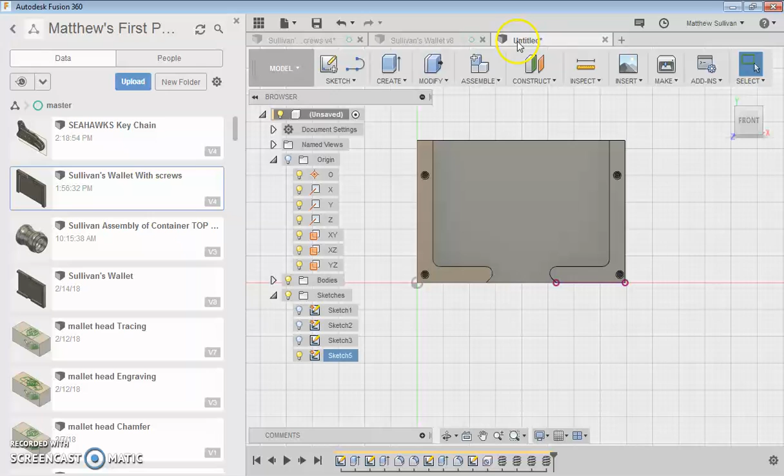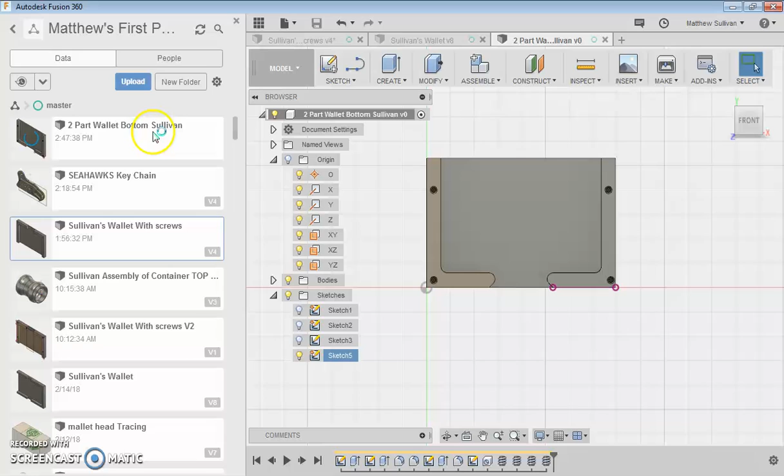All right, welcome back. First thing we never did is we never saved our project. Our project is still untitled. I'm going to go ahead and hit Control S. I want to call it two part wallet, bottom, and I'll put my name. Go ahead and save. Don't put my name on your part, but do put your name on your part.

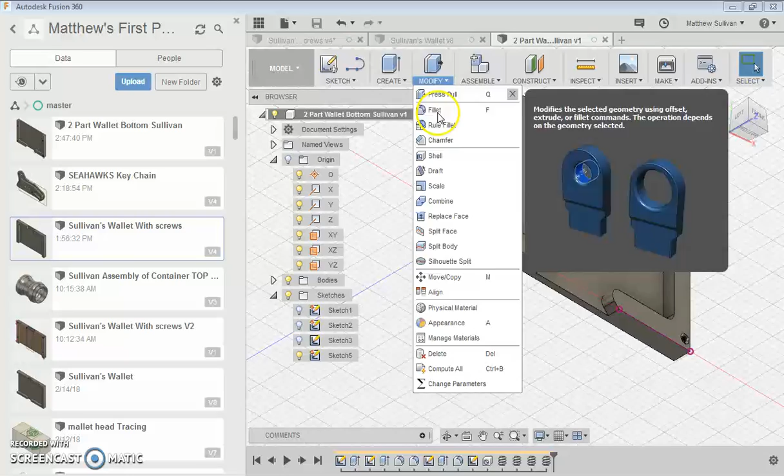The next thing you're ready to do is start modeling the top piece. In order to model the top piece, I think the most important thing to do here is go over to modify, even before you begin. I kind of think these corners are pretty sharp - you might rip a hole in your pocket. So put a fillet, some sort of fillet or radius, on these edges.

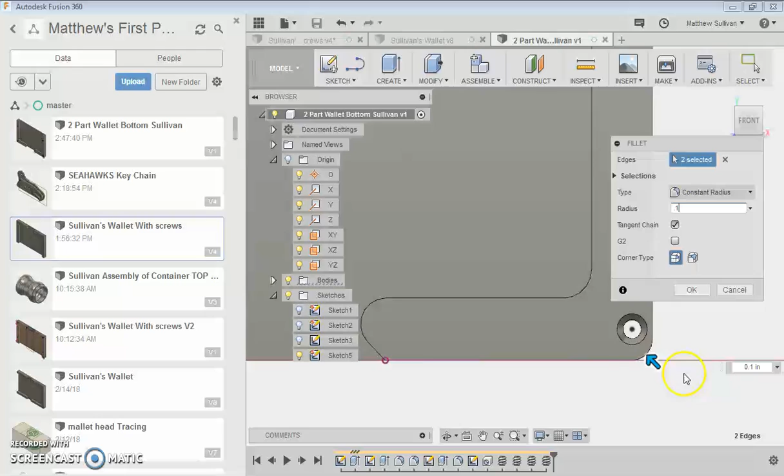It doesn't need to be crazy, doesn't need to be too big, but try 0.05. Maybe play around with the radius, or maybe go a little bit more, like 0.1. It appears you should have enough room here all the way around your holes. It looks like I have a dimensioning issue right there - this side looks great at 0.1, but this side looks like I'm too close and not lined up with this feature over here. So I'm going to select OK.

I'm going to come back over here under my sketch, edit sketch, and I obviously have a typo. 3.825 should be 3.825, not 3.875. So if you think something is goofy or wrong, go ahead and adjust that.

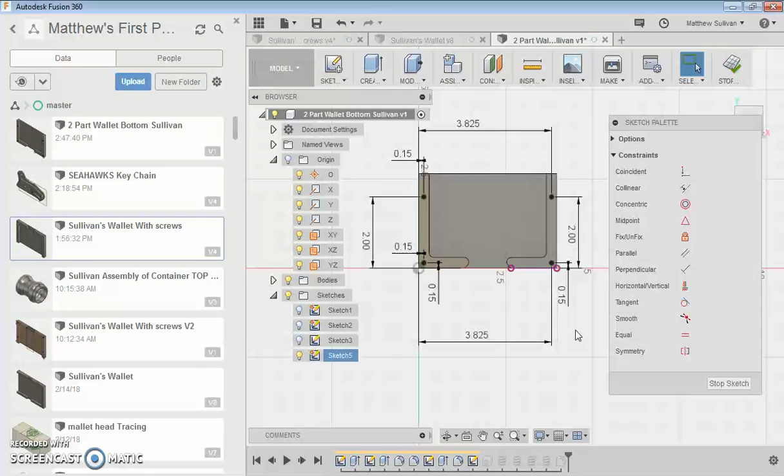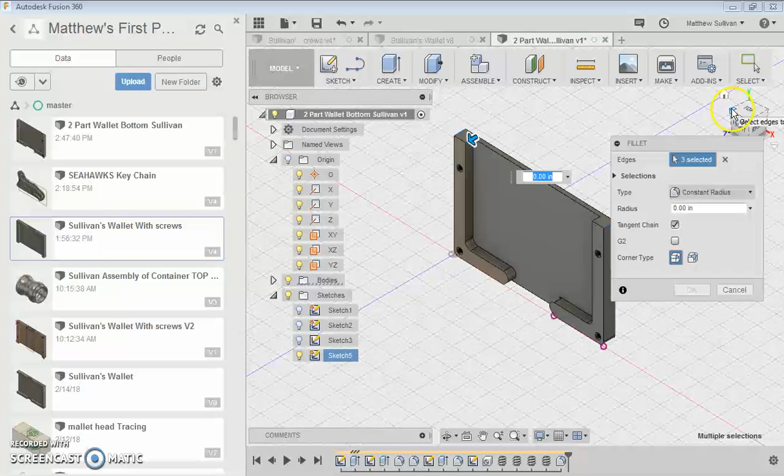Now things look a lot more uniform. I'm also going to do a radius so I don't rip a hole in my pant pocket. I'm going to do a little radius here - a fillet. Actually it isn't a fillet, it's actually a radius on these features. So a fillet is on the inside, a radius is on the outside.

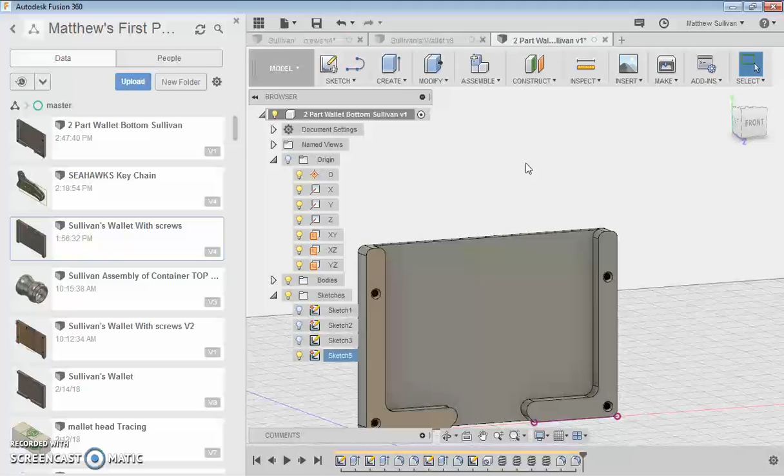0.05, I believe, is the size of the radius I did on the other one. Maybe I did 0.1 - if you did do 0.1, you could always double check. I did do 0.1. You just click down here, change it to 0.05, or 0.1, select OK, and now you have fillets that are 0.1 all the way around the external or outside of your part. It's kind of up to you if you want an inside radius.

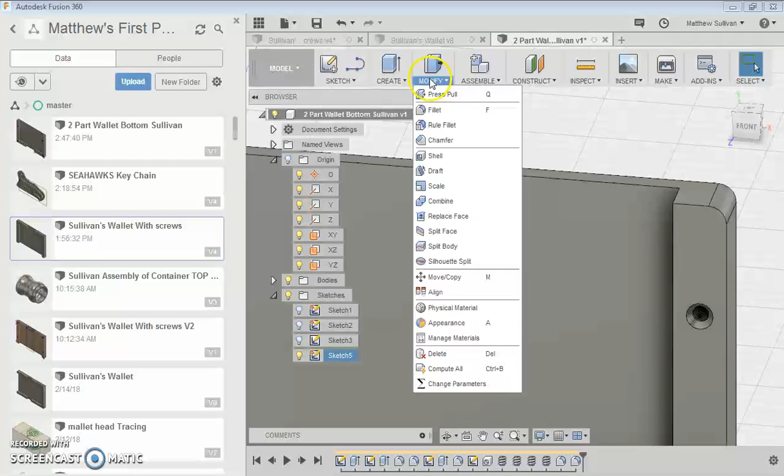Maybe you only want to do these edges here, this one and this one, at 0.1, and not do the inside radius, or maybe you want it even a little bit smaller. But you can still do it - radius tool, modify, fillet. You could do something like 0.025, 25 thousandths radius, just something really shallow to round it out so you don't have a sharp edge, or break a credit card, debit card, or ID.

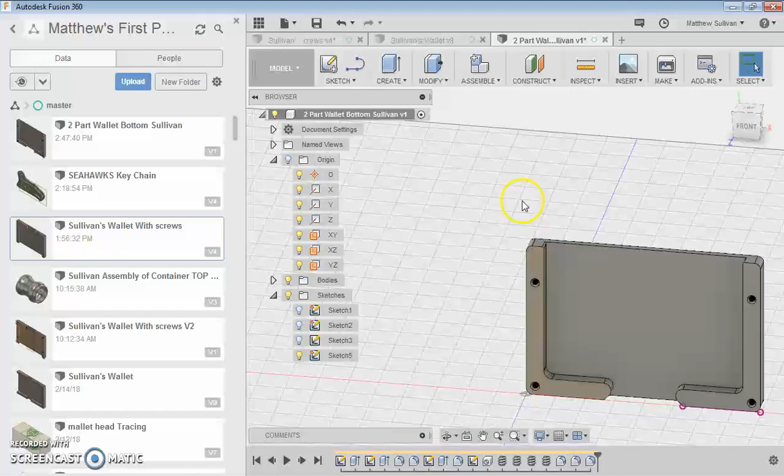Now you're ready to begin modeling. So save your part one more time. Now you're ready to begin modeling the top. Modeling the top is not too difficult - there's a couple different ways you can go about it.

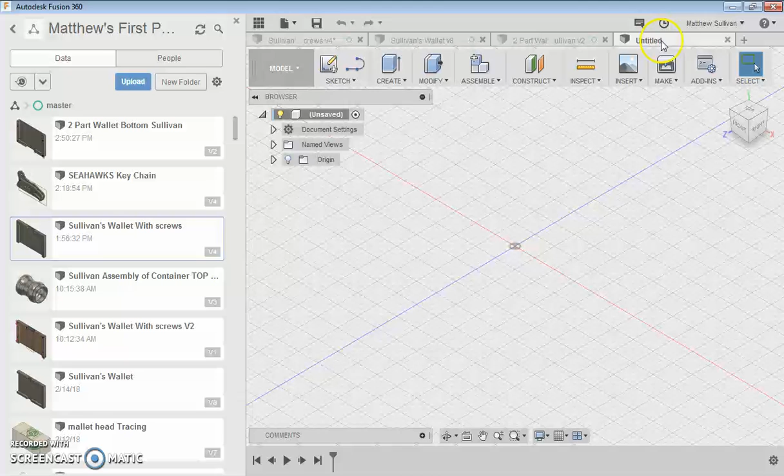You could model it right here, but I'm a big fan of making a new model. So go hit File, New Design, and a new design will pop up. Right now in this new design, do a file save as or Control S and label it - call it top, or two-part wallet, top, Sullivan.

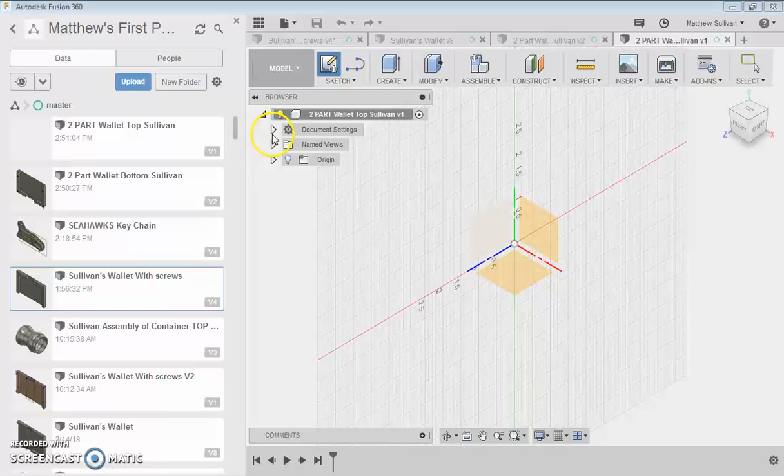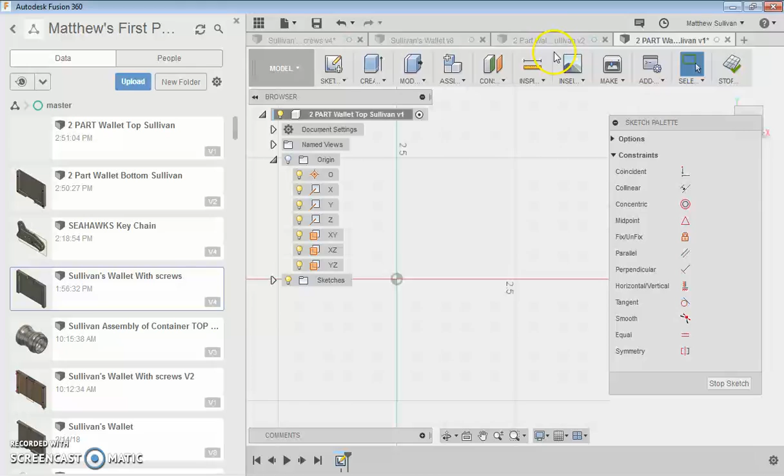Your sketch must be on this XY plane. If you're not sure where that is, you can just highlight it right here, or select it right there, as I did. You're going to create the sketch - I already created the sketch. I meant to go to two-point rectangle, and you're going to make the rectangle the exact same size as the bottom. So going back to our previous sketch, come on over here, double click it.

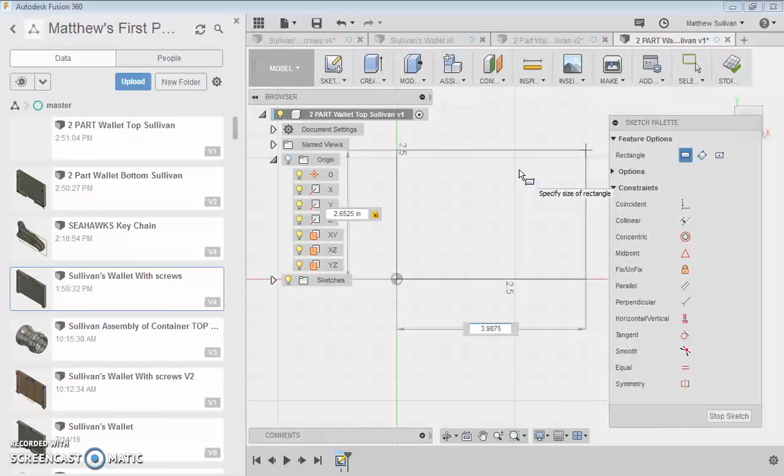These are the numbers we're going to work with: 3.9875 and 2.6525. I'm not even sure if I'm going to remember that, but 2.6525, I believe, and this one was 3.9875, I believe - we'll flip back over, 3.9875.

And 2.6525. Okay, perfect. Stop sketch. Now we're ready to go ahead and basically just extrude it.

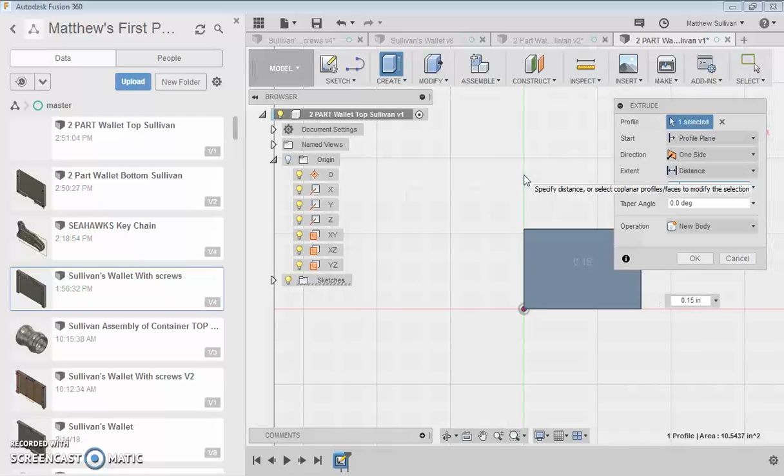I'm going to extrude it. I only want this thing to be 0.15. It's going to be pretty tall, maybe 0.125. Make it 0.125, that should be plenty big, with a relatively thin piece of metal here.

So I'm going to hit home, so we're in the right orientation. Now we're going to go ahead and do all of our drilling on the top part. Make a new sketch, and we're going to go ahead and use the points.

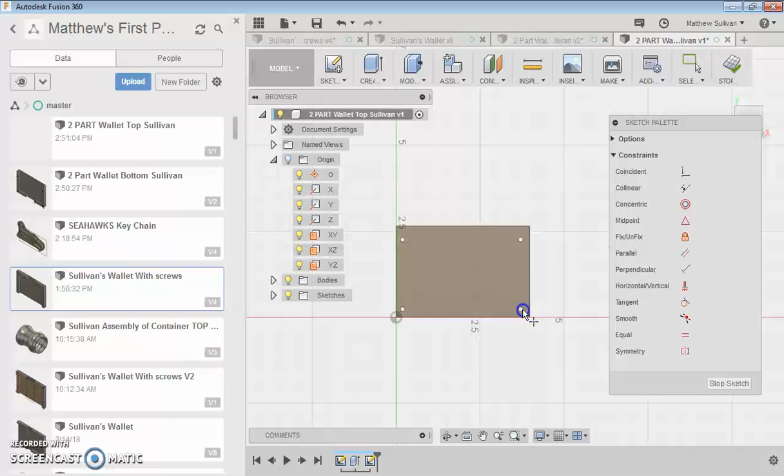Put your points exactly where you had them before. Dimension tool. These dimensions up are all 2 inches.

I just selected on the keyboard, I just hit the D button for dog. D is in dog. It's just a quick key. Instead of coming up here every time and going over to dimension, it just says use the letter D. So that's why I kind of flipped over to that pretty quick.

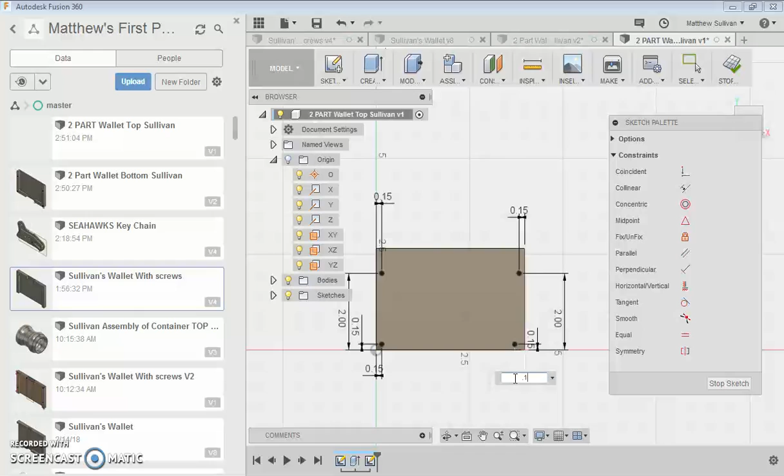If you don't exit out, I happen to know this is 0.15 over the edge here and over the edge here. So stop sketch, I'm ready to begin.

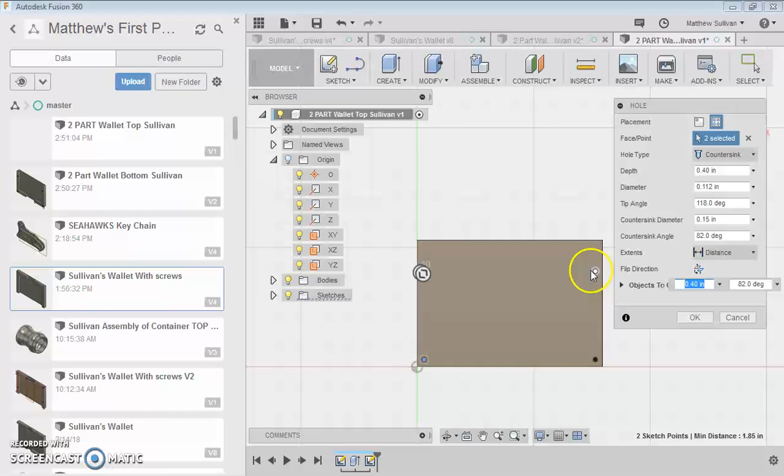Creating my hole features, which I want 1, 2, 3, 4. It should end up saving all the dimensions the same. Depth 0.4 is way too deep, but that's okay. Diameter 0.112, tip angle 118, countersink diameter 0.15, countersink angle 82 degrees.

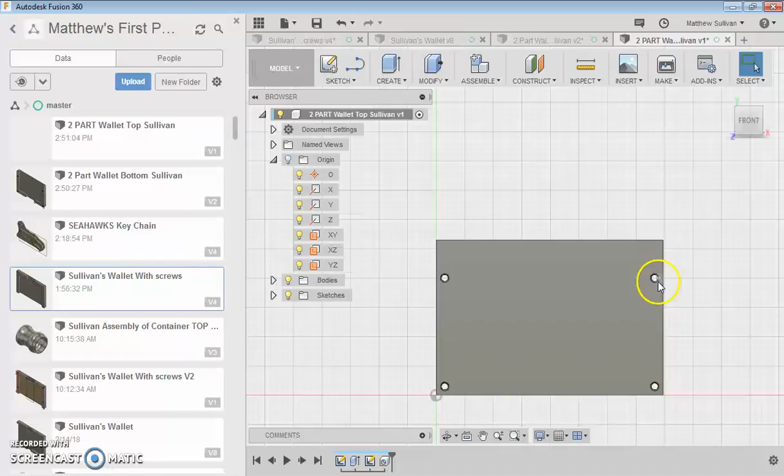We have 4 selections. If I select OK right now, we should get 4 holes. Flip it over like this. Now we're ready to go ahead and create threads on each of these.

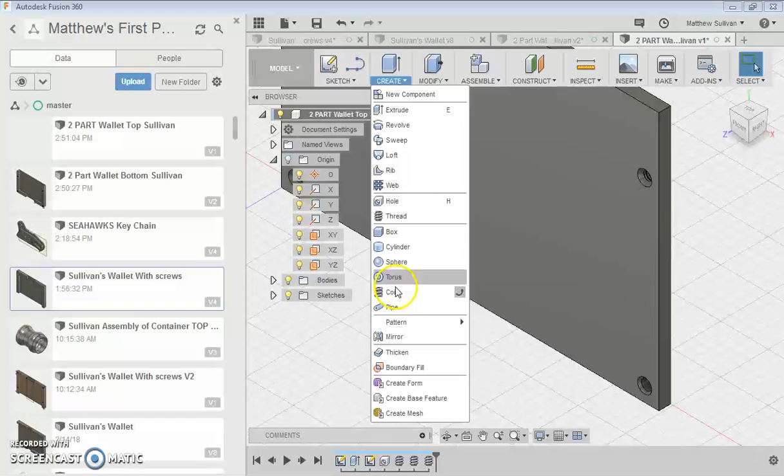So select this, model, OK. Create threads. I don't know why we can't just select all, but... and one more, create threads. 1, 2, 3, 4 holes.

Now you can do whatever type of design you want on this feature, it's totally up to you. At this point, you can go ahead and insert an SVG for a logo.

Under my downloads, I have a ton of cool SVGs. I have American flags, I have Blackhawks, Bears. I might do a Bears wallet.

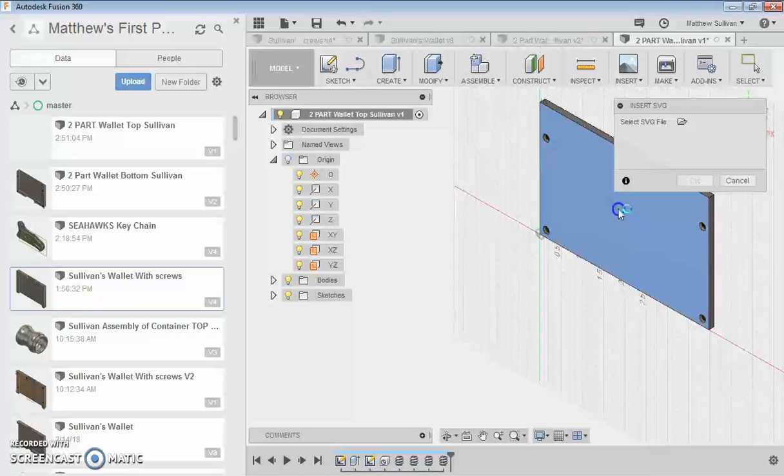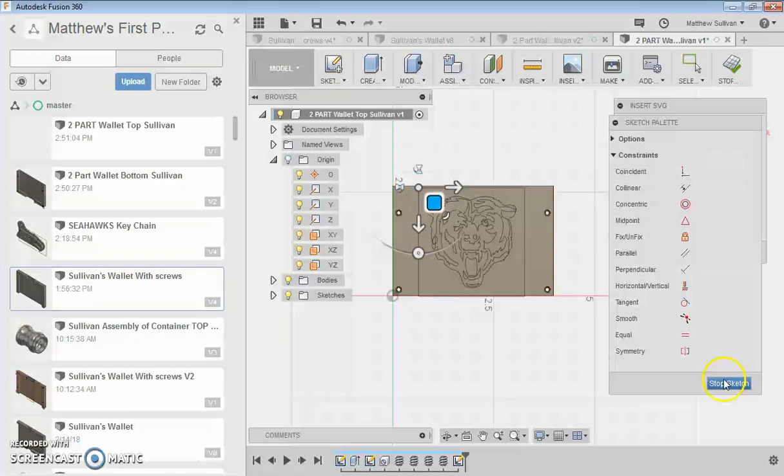Choose this face, and you can move around with the square blue tool button. You can move things around with this, and you just kind of have to eyeball it to center. I don't know exactly how to get it exactly center, but maybe you could just draw a center line down the middle, and then just eyeball it, but I think it's pretty close to center right there.

Stop sketch. I can even edit this sketch, and I think it's all fixed because it's all green, so you can highlight it and unfix it. And now you delete your lines.

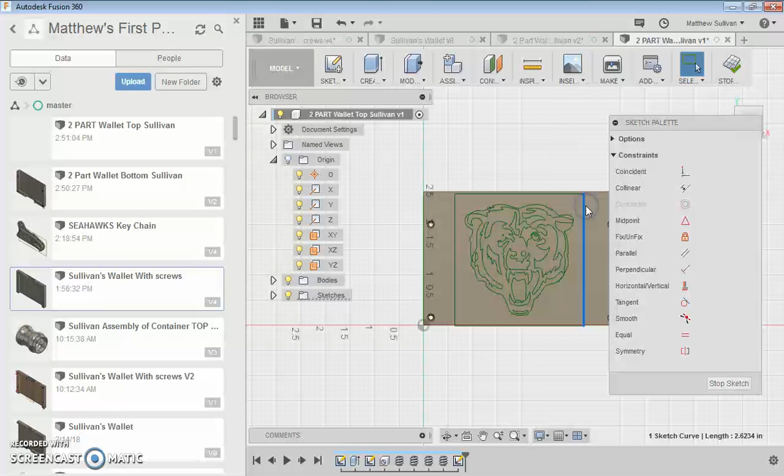And once you go ahead and do that, you can go ahead and save your features. Hit Control S. You can always do whatever type of cutouts you want in this part if you wanted to remove something, or if you're just happy with the Bears logo.

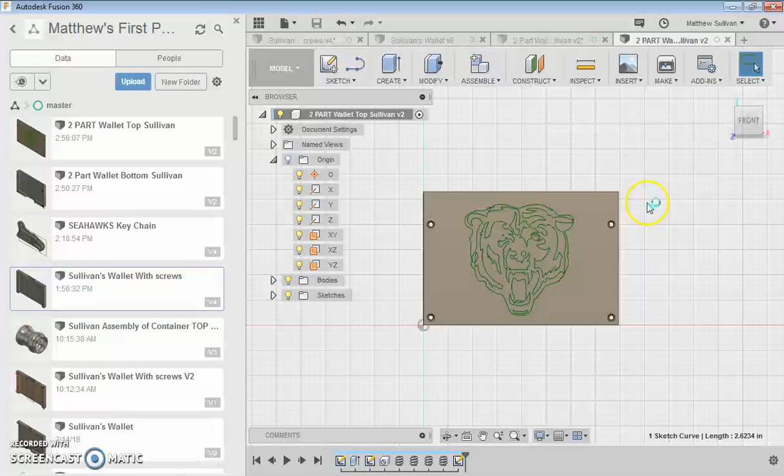Last thing you think of right now is you're going to go ahead and do the modify fillet tool on all 4 corners. So I'm going to flip it up like this. This one, and they're all going to be 0.1.

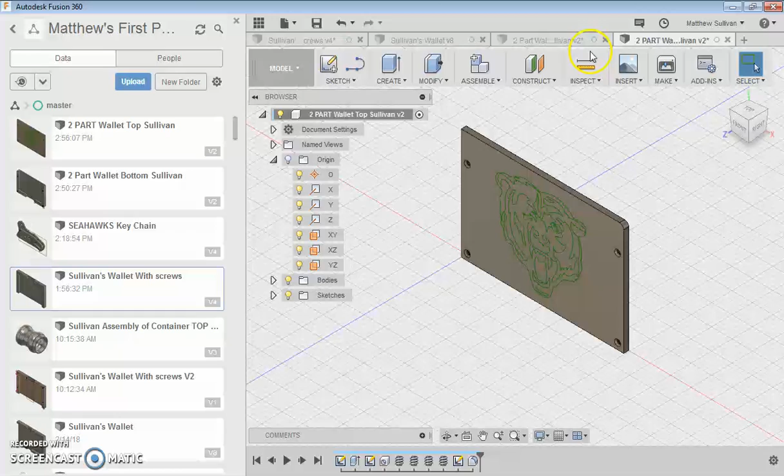I think right when you type in a dimension, it doesn't like that. So click on all the corners, flip this around on that corner. -0.1.

And whatever else you want to cut out or design in your part, that's up to you right now. It's totally open to you.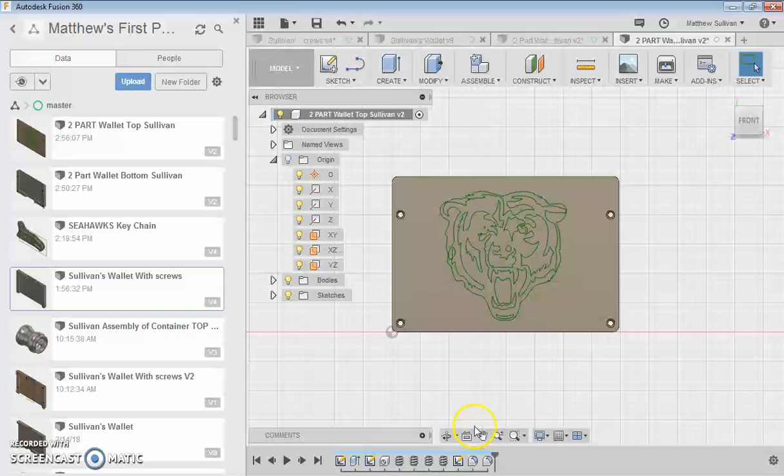If you want to come back in here and edit the sketch, you might be able to highlight and move things around. I'm not 100% sure if you can go under modify and move, copy, and move things. I don't exactly know how to do that, but anyways, that's pretty much the end of the design for that top wallet. Enjoy.